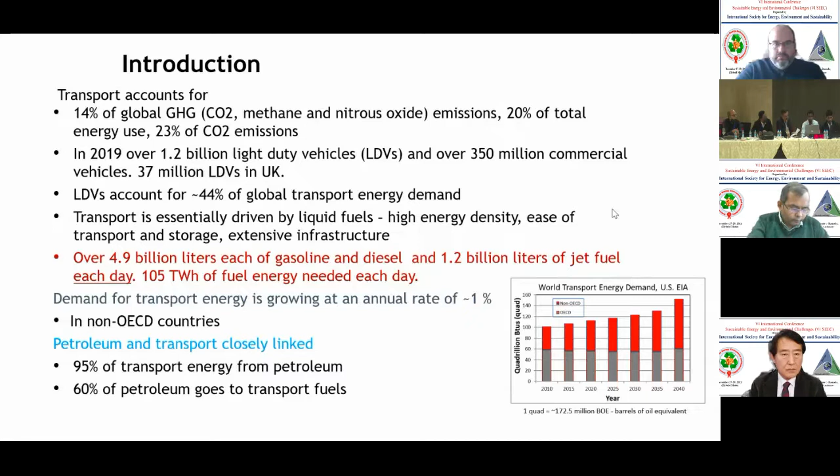Now I'd like to focus on electric vehicles. As you know, there are different degrees of electrification. Of all these, only full battery electric vehicles do not have an internal combustion engine, and all their energy comes from the electricity grid. There are, of course, in between vehicles like hybrid electric vehicles such as the Toyota Prius, which have a small battery. However, all their power and energy comes from the internal combustion engine. But electrification makes the whole process more efficient.

We also have plug-in hybrid electric vehicles, but these also have an internal combustion engine. So if you want to eliminate internal combustion engines, you have to replace all the cars with battery electric vehicles, essentially. Of course, we know that hybrid electric vehicles are the most practical and proven technology, and they're currently available, and they can reduce fuel consumption in gasoline light-duty vehicles.

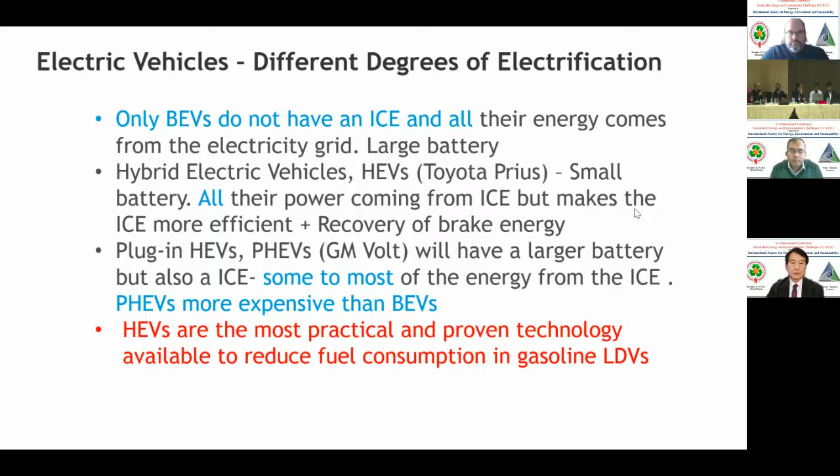Now, battery electric vehicle numbers are increasing fast. There's no question about it, because they start from a very low base. By the end of August 2021, the world had about 6.5 million. In fact, now they say there are about 7 million battery electric vehicles in the world, which is still about 0.5% of the total number of light-duty vehicles.

But another thing you have to remember is that battery electric vehicles are not really relevant for heavy-duty, long-distance road transport, shipping, and in fact it's impossible for aviation. So even if you replaced all cars, LDVs, with battery electric vehicles, you would still address only about 44-45% of global transport energy demand. We have to remember this.

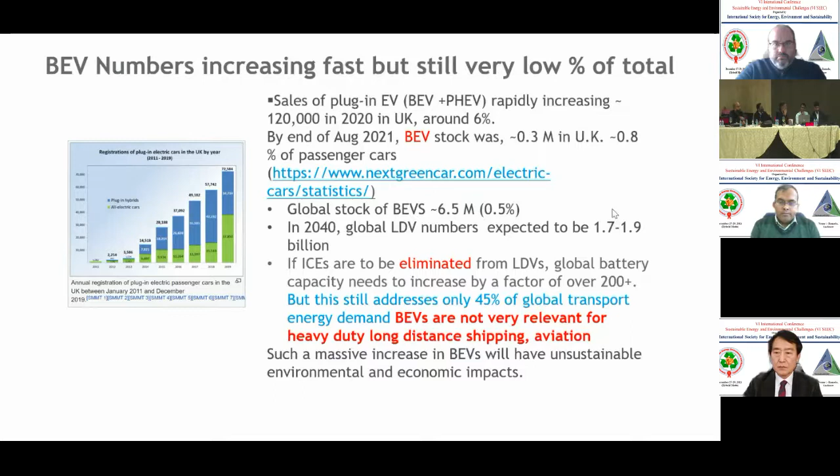However, such a massive increase in BEVs will have unsustainable environmental and economic impacts. Next slide, please.

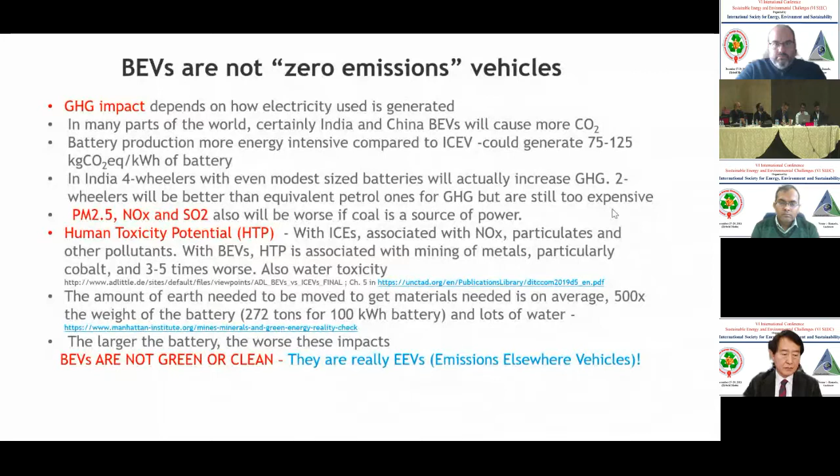What we have to remember, and what governments conveniently forget, is that BEVs are not zero emission vehicles. The greenhouse gas impact depends on how the electricity used is generated. For example, in India, a BEV will cause more CO2 in most places because electricity is generated from coal mostly. And of course, on a life cycle basis, battery production is very energy and CO2 intensive.

And if you take all this into account, for example, a recent study we completed with Professor Agarwal's group and so on, in India, four-wheelers with even modest size batteries will actually increase greenhouse gas emissions. Two-wheelers will be better than the equivalent petrol ones because they have very small batteries, and therefore the embedded energy and CO2 in the battery production is very small.

But these are extremely expensive still. I mean, most people who buy two-wheelers probably cannot afford to buy them, actually, even with existing subsidies. And of course, other emissions like...

particulates, NOx, and SO2 will also be worse if coal is the source of power. And similarly, human toxicity potential is associated with mining. So what you're basically doing is exporting the health impacts of battery electric vehicles somewhere else where they are not used, essentially.

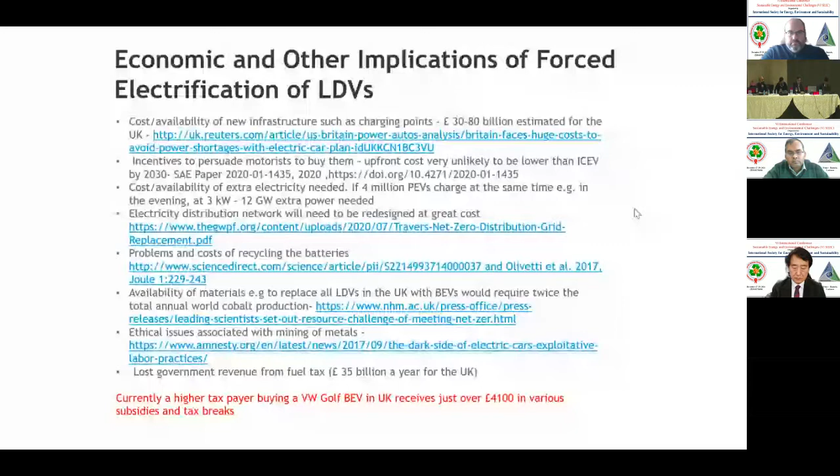So what is to be done to reduce impacts of transport? We have to recognize the scale of the challenge honestly. For example, aviation cannot be truly decarbonized. If you want to decarbonize aviation for all practical purposes, you have to shut it down. And you have to assess the impacts honestly on a life cycle basis, and recognize that alternatives, BEVs and new fuels, start from a very low base and face huge environmental and economic barriers to quick and unlimited growth.

Of course, there is significant scope to reduce energy use in ICEVs, in other words, improve its efficiency, for example with partial electrification like hybridization and so on. And there are other possibilities, using legislation to discourage travel, increase taxes on big cars, and so on. But these are beyond the scope of this talk.

The important thing to remember is we have to sensibly deploy and continuously improve all available technologies. BEVs cannot, and in fact must not, for environmental and other reasons, completely replace them.

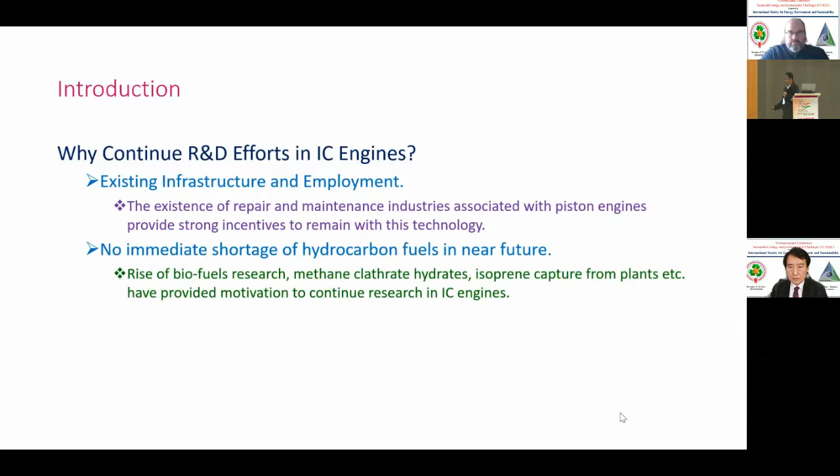There is no immediate shortage of hydrocarbon fuels in the near future. With the rise of biofuel research, methane clathrate hydrates, and isoprene capture from plants, there is motivation to continue research in IC engines. The only remaining question is increasing efficiency and reducing emissions. With the advent of fuel reforming, hydrocarbon fuels are not seen to be significantly different from each other. This concept has opened the opportunity to develop engines that can operate on multiple fuels, although this has not been pursued strongly in India.

Renewable fuels and carbon recycling become one of the avenues to address the issues of dirtier IC engines. Usage of renewable fuel helps address the typical notion of dirty IC engines, as carbon recycling and supplanting conventional fossil fuel becomes possible.

Whenever dealing with renewable fuels, the combustion and thermophysical properties play a role in the utilization percentage of the renewable fuel, so we are focused on that. What is basically a typical drop-in fuel? For a drop-in fuel, you need to match the thermophysical properties as well as the combustion properties.

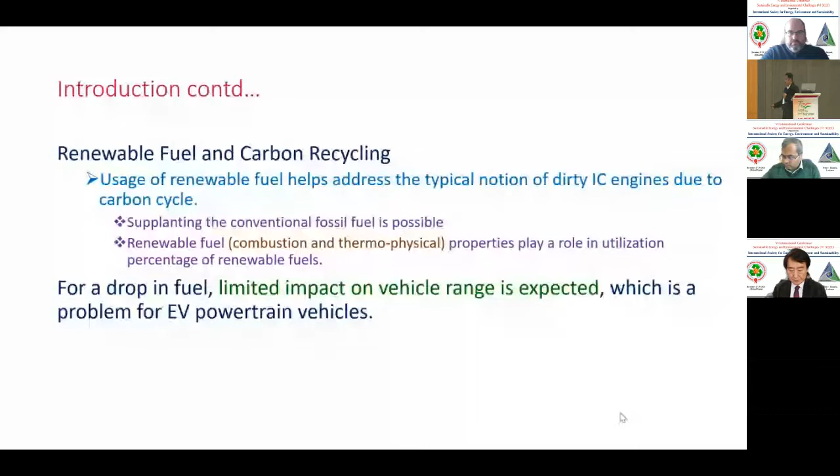What our research has focused on for a drop-in fuel is the limited impact on vehicle range, which is a problem for electric vehicle powertrains, and also from an implementation perspective, the drivability, that is the coefficient of variation, should be limited to 10% and needs to be looked into.

Now, with the recent trend of elimination of smaller size diesel engine passenger vehicles from the BS6 norms perspective, a test case for SI engine is considered. We see there are multiple alternative fuels available for CI engines, but very limited fuels are available for SI engines. So I have taken here the cases for SI engines.

Okay, so coming to the first test case where PFI engine performance is shown on ternary blend involving the lemon peel oil, the ethanol, and gasoline. And these are the typical properties being compared.

If you look into the properties, the calorific value as well as the stoichiometric air fuel ratio are very comparable to gasoline, and it has got acceptable octane number rating also. In case of the ternary blend, we could always use the ethanol from the octane number improvement perspective.

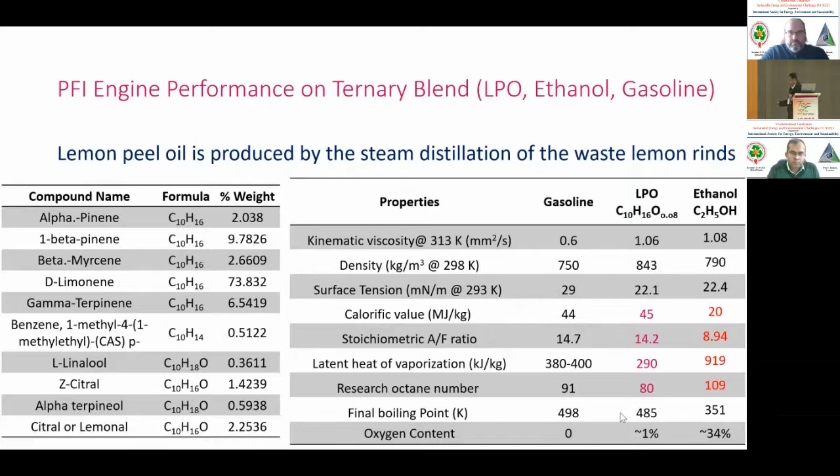Now, the blend properties from the perspective of heat addition per unit mass in cylinder for drop-in fuel perspective: a deviation within the limit of 5% is considered here, because we were looking into keeping the vehicle range the same, as well as having the coefficient of variation less than 10%.

We all know that if you go with ethanol, increasing the ethanol percentage beyond 20% leads to the coefficient of variation greater than 10%. So there are restrictions when you deal with other alternative fuels.

Now this means that we ensure heat addition per unit mass in the cylinder, with respect to the conventional fuel and the renewable fuel blend, limits to plus minus 5%, but that doesn't mean that the kinetics is the same.

What we expect is a limit on the growing discrepancy, because we always know that heat release per unit vessel mass would control your temperatures, and the Arrhenius law will play a role in reaction rate kinetics, and the discrepancy would be limited if we try to maintain that.

So we already know that the peak pressure based combustion phasing is observed to be advanced for this ternary blend, because both LPO, that is lemon peel oil, as well as ethanol have higher flame speeds compared to gasoline.

Now here, if you look into the nomenclature, the alphabets G, E, and L refer to gasoline, ethanol, and lemon peel oil, and the numbers indicate the volumetric fraction used in the blend.

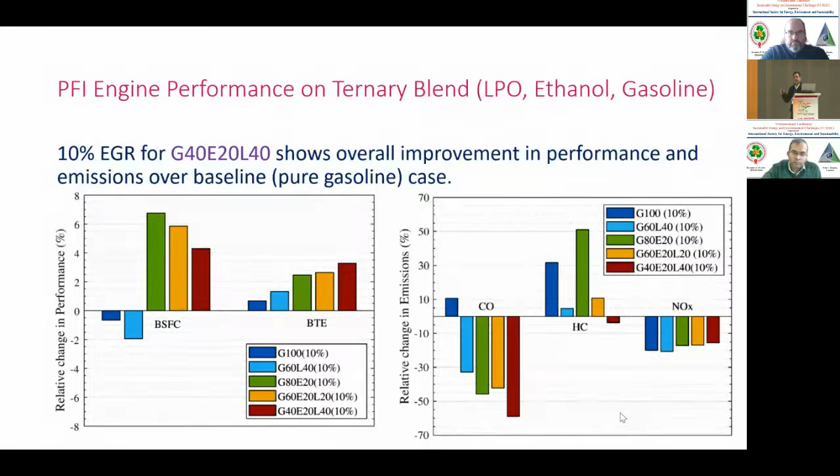That's because we have to deal with the utilization of 10% EGR to bring this NOx down compared to the baseline gasoline. So we can say that G40, E20, and L40 gives overall improvement in performance over baseline gasoline with 60% utilization of renewable fuel.

So coming to the next test case, which is essentially the spray characterization perspective on alternative fuels for GDI engines. For liquid fuel combustion, atomization plays an important role in mixture preparation, and thermophysical properties of renewable fuel impact spray formation. For this, we have utilized the constant volume chamber for spray diagnostics and the PDPA measurement campaign.

What is done is the ambient conditions are changed to simulate the pressure and temperature conditions for 30-degree BTDC, 60-degree BTDC, and 90-degree BTDC crank angle. So the pressures and temperatures are somewhere like 1.5 bar 329 Kelvin, 2.5 bar 371 Kelvin, and 6 bar 453 Kelvin.

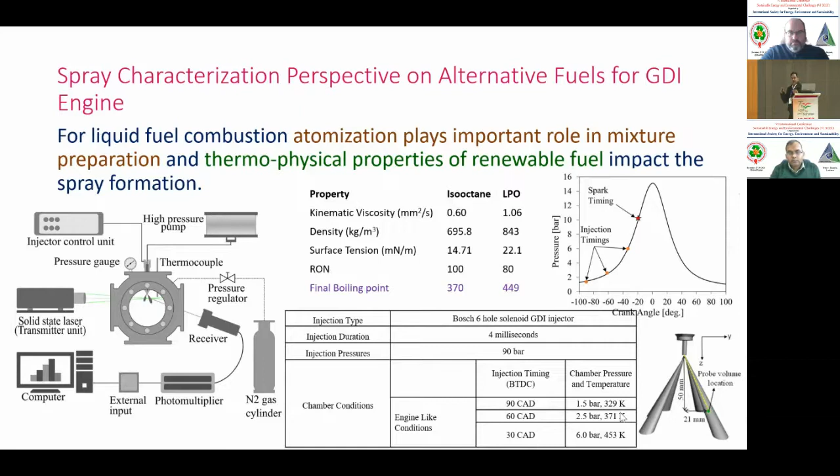So if you look into the boiling point, we are looking at the isooctane and LPO comparison, like non-evaporating sprays and near-evaporating sprays.

Okay, so here, again from the perspective of brevity, I am just presenting the salient results, and you are seeing here the isooctane and lemon peel oil cumulative volume fraction for the first situation, 1 bar and 298 Kelvin. Both of these sprays are non-evaporating sprays. Then isooctane goes close to near evaporating in comparison with non-evaporating LPO sprays. Then you have got evaporating isooctane and near evaporating LPO spray here.

So if you look into the perspective, you compare at 17 micron SMD, the droplet size. The cumulative volume fraction is indicating that the LPO is atomizing the chunk of liquid fuel only close to 45% below 17 micron droplet size. All the rest is above the 17 micron droplet size. And for isooctane you are seeing it's nearly close to 80%, from the atomization perspective.

So that leads to the conclusion slide. We have demonstrated 60% utilization of renewable fuel. Matching the combustion and thermophysical properties enables maximum utilization of the renewable fuel. For 100% renewable fuel, intricate thermal management for fuel delivery and EGR would need to be looked into. Considering the roadmap for the future, looking into variable compression ratio of opposed-piston engines for full reliance on renewable fuels may be needed to improve thermal efficiencies compared to the alternate powertrain. With that, I'll finish my presentation.

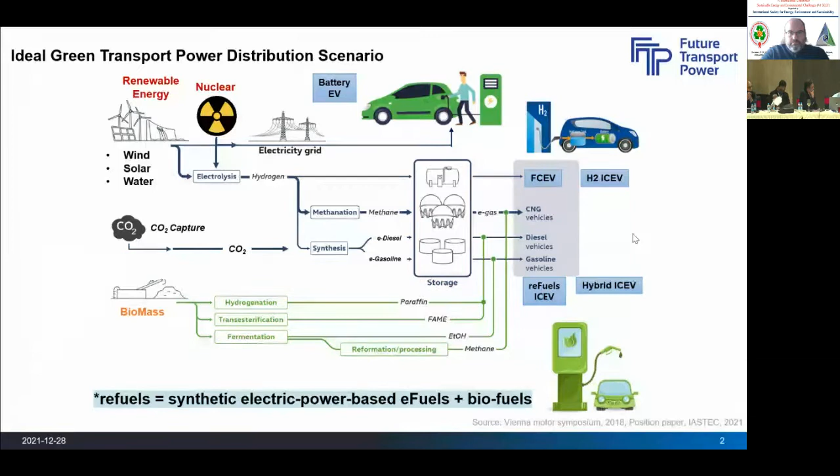Next, please. This e-fuel is a synthetic carbon-neutral fuel which is made by the recycling of CO2. Even though the internal combustion engine emits CO2, this is captured and then combined with hydrogen to produce e-fuel. The hydrogen is produced through electrolysis, utilizing the electricity made from renewable energy resources. So this cycle makes carbon neutrality. Next, please.

This is a type of ideal e-fuel production. CO2 is captured from the ambient air, and the green hydrogen is combined through the Fischer-Tropsch process to make higher-value hydrocarbon fuels compatible with gasoline, diesel and so on. So this kind of liquid fuel production utilizing CO2 serves CO2 reduction. Next, please.

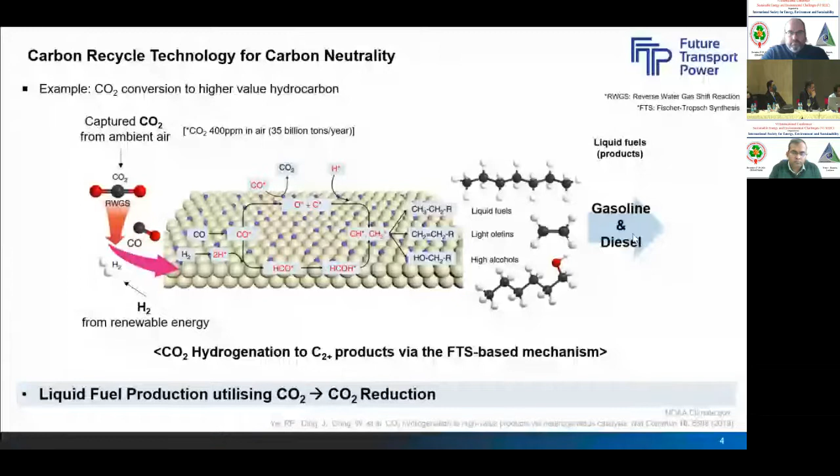E-fuel is a product of CCU technology, which is carbon capture and utilization. Starting from the basic e-fuel, hydrogen, the spectrum of e-fuel covers all different kinds of hydrocarbons such as e-gasoline, e-diesel, e-LPG, e-jet fuel, e-methane, e-DME, e-methanol, e-ammonia, etc. Especially e-methanol and e-ammonia are regarded as very effective liquid energy carriers which can compensate the lack of renewable energy in most advanced countries. So e-methanol and e-ammonia could be traded globally to make the balance and suffice the need of energy.

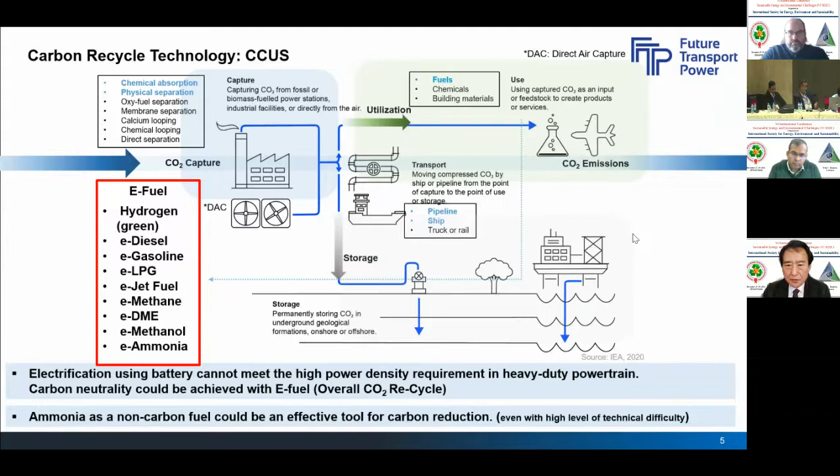And e-fuel is desperately needed for the high energy and power density transportation field, which was already mentioned by Dr. Gautam Kalghatgi, and I found yesterday in session 1A on fuels, this kind of e-fuel production, application and feasibility were already touched. I appreciate the comprehensive contents of the 1A session. Next, please.

One big challenge for e-fuel is the efficiency issue. Compared to battery electric vehicles, the internal combustion engine vehicle utilizing e-fuel has very low efficiency under the condition that all the energy resources are from renewable energies. Still, we should improve the efficiency by maximizing the use of hybrid powertrains. The efficiency of this is still half of the battery electric vehicle, but definitely you still need this kind of fuel for high energy density and high power density transportation tools, such as aviation, marine, and heavy-duty on-road vehicles. Next, please.

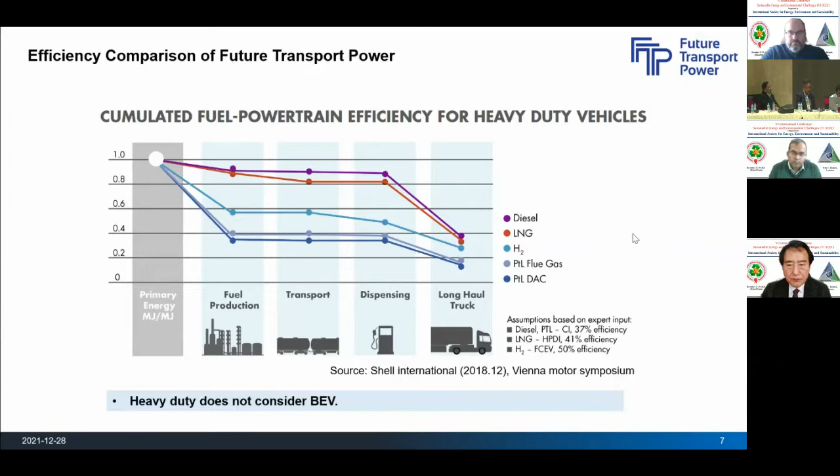This is an example of the heavy-duty vehicle case. This is the field where the battery electric powertrain could not be implemented. The efficiency of e-fuel is still just half of the conventional diesel powertrain. Next, please. However, in the case of marine application, the level of efficiency of the internal combustion engine is similar to or higher than the battery electric vehicle.

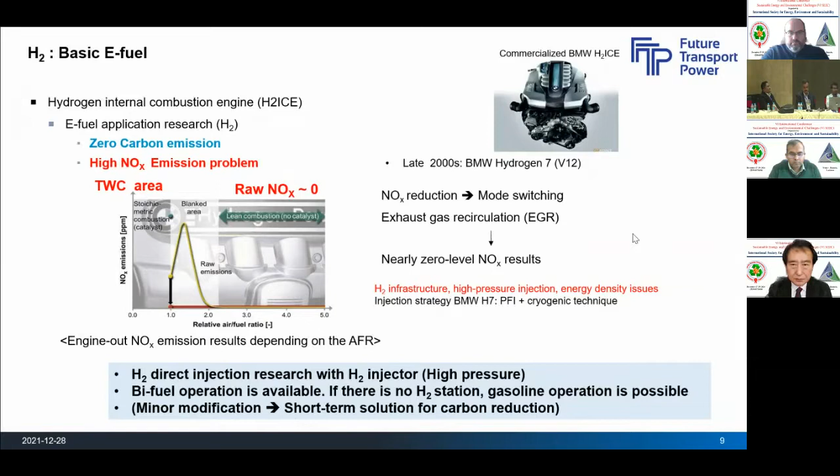Next, please. The very basic e-fuel is hydrogen, and we are trying to achieve carbonless combustion operation. This hydrogen combustion would be a perfect carbon neutral solution as long as NOx emission is reduced or removed somehow. Next, please. We are trying to realize the hydrogen internal combustion engine

by optimizing the lean stratified charge combustion. This optimal design could be done by the observation of hydrogen jet and mixture formation followed by ignition and flame propagation. Next, please.

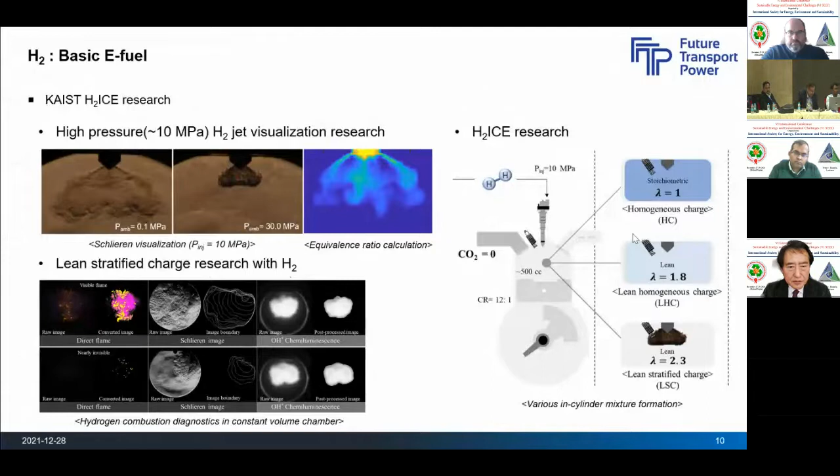Let me summarize by rephrasing the benefits and the visions of e-fuel. It is effective to import liquid energy carriers by applying power-to-liquid technology, which has a high energy density. Liquid fuels are economical for storage and transportation, while renewable energy resources are not enough in most countries.

E-fuel is part of carbon capture and utilization technology that actively utilizes and reduces carbon dioxide, and is essential as a transport power fuel with high power and energy density. Large commercial vehicles are expected to develop technology with the adoption of e-fuel.

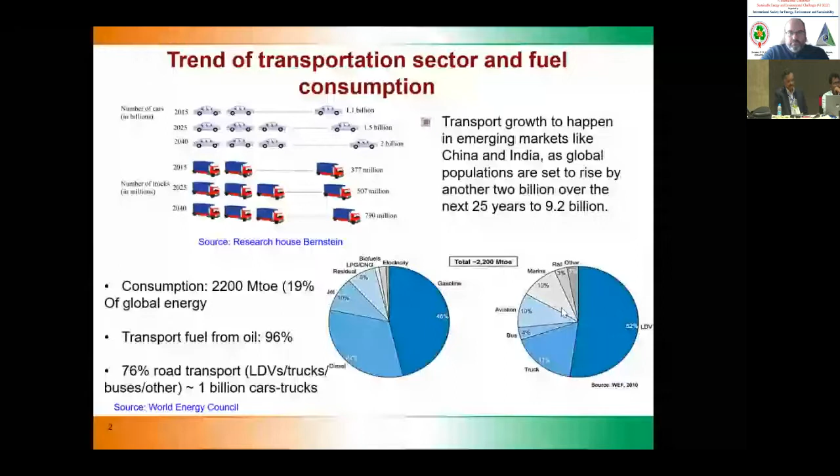So the basic idea is that road transportation will be dependent on fuel powered vehicles. That is the basic motivation for this slide, and Professor Kalghatgi has presented a lot more data on this. So next slide, please.

And then there are customer demands; people want to use SUVs and more torque or power, and these kinds of demands are there. So these are the challenges, and based on these challenges, there are several options available.

Options such as battery electric vehicles, fuel cell based electric vehicles, hybrid vehicles, and alternative fuels or alternative combustion engine based vehicles. There are many alternative fuels like alcohol and natural gas. In all of these there are critical obstacles for implementation. Some of these obstacles were already discussed by Professor Kalghatgi regarding battery electric vehicles, based on the availability of raw material, economics, and several other aspects.

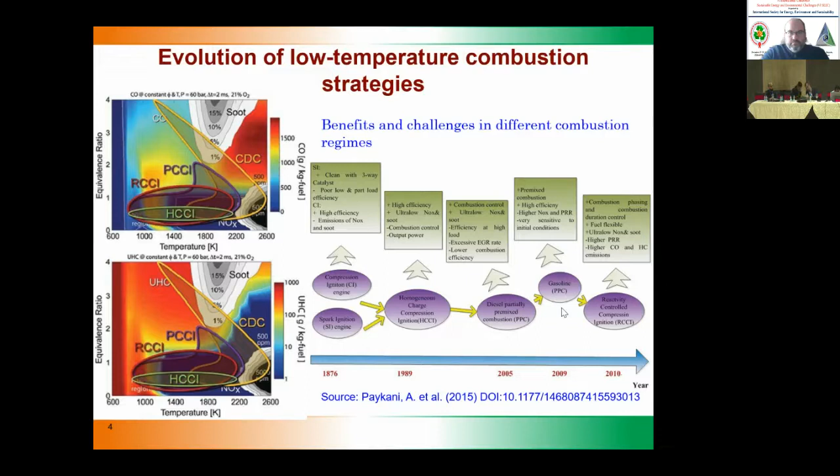And low temperature combustion means it is well below the temperature limit of NOx formation and soot formation, which can be seen in this graph of the operating range of various low temperature combustion strategies. So this is just an overview. Next slide, please.

So based on this, I have just tried to summarize the aspects of the IC engine research. So we have to improve the efficiency and reduce the emission. For this, the combustion control and after treatment system, like the low temperature after treatment systems, are required. So gasoline particulate filter and these things are coming up because of gasoline direct injection and all.

So with respect to this, maybe we have to work on alternative fuels, like low octane fuel like naphtha for gasoline compression ignition kind of modes, and high carbon alcohol fuel, maybe butanol, it has better mixing characteristics. And these are some of the things related to alternative combustion regimes, like HCCI, RCCI and all.

There are many challenges. You have a minute to continue, yes, please. Yeah, so next slide, please.

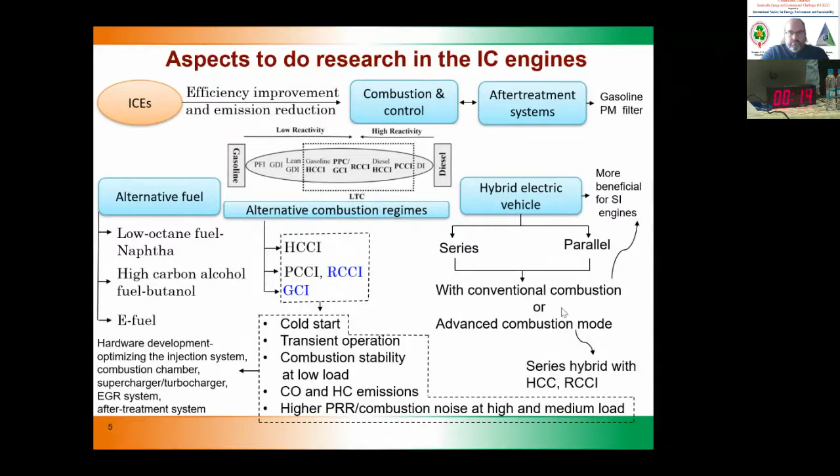So this is just an option that these low temperature combustion vehicles can be used for hybridization, and it may work better because it has better efficiency at lower engine loads also. So next slide, please.

So from this, I just wanted to emphasize that for several decades, powered by internal combustion engines, global transport is dependent on fossil fuels, and we have to work in development of clean alternative fuels and alternative combustion modes, and hybridization with advanced combustion modes such as RCCI will be possible.

And the future transport will rely on various government regulation policies with respect to infrastructure, emission regulation, and the production related issues with refineries. And it also depends on consumer behavior, perception, and choices. This will lead to the future of the transportation sector.

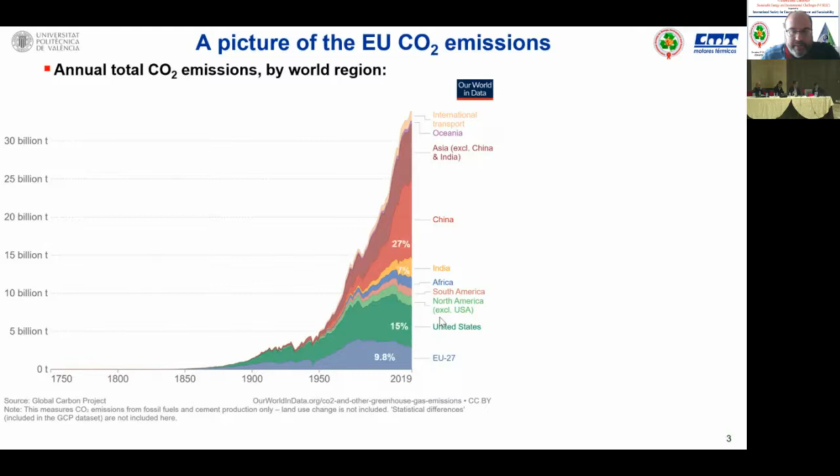Next slide, yeah. Okay, so here you have a picture of the European CO2 emission, in which you have the annual total CO2 emissions by global regions. So there you can see in different colors the European Union. You can click, please, in order to put the animation. One more, okay, up to there. Just slide number 3, okay.

Well, the thing that you can realize here is that we have a huge increase in the CO2 emissions, but in those regions which are the more dominant producers in terms of CO2, like China, for instance, or Asia, excluding China and India.

Well, if we go to European road transportation, we have something like 18% of the total CO2 in Europe. So if you go in detail for each one of the different sectors, you can realize that heavy duty is around 25%, medium duty is something like 12%, passenger cars are around 60%, and bikes are almost negligible.

So this means that in terms of the European Union, it's representing a small part of the total amount of CO2 in the world. So we are discussing in Europe about 1.7% of the world CO2 emissions. So it's quite a small number. So maybe you can go to the next slide.

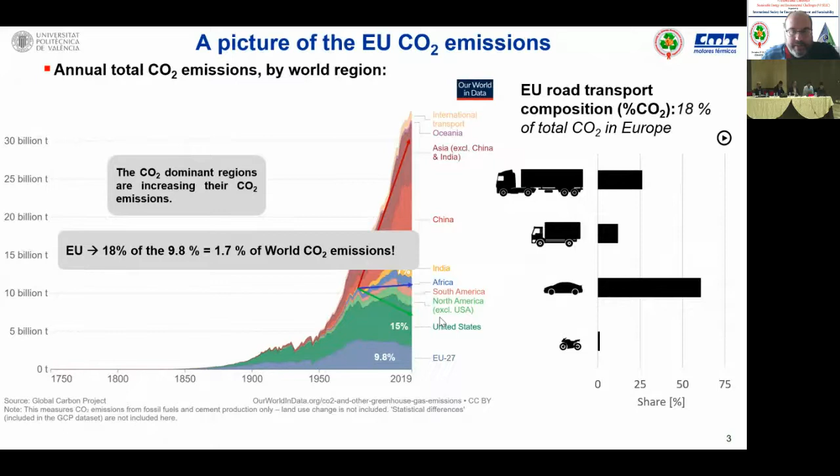The idea is how the European Union is planning to reduce this 1.7% of CO2. So next slide. You can make all the animations for this slide. One more.

Okay, that's it. Well, if you take the recent movements of the European Union, you can see that in 2019 we started with the Green Deal. This means that net-zero greenhouse gas emissions are needed by 2050. In 2020, Euro 7, as a regulation, started sounding very hard, but even now it's not in the street. Euro 7 is focused on accelerating the shift to sustainable and smart mobility.

And finally, in July 2021, Fit for 55 appeared, which says that at least 55% of the emissions we have right now need to be reduced by 2030, and all new cars registered by 2035 will be zero in terms of tailpipe emissions. This means either electric vehicles, hydrogen or ammonia. But this doesn't necessarily mean that we are going to ban all internal combustion engines in Europe, because internal combustion engines can be even cleaner than electric vehicles. So maybe next slide.

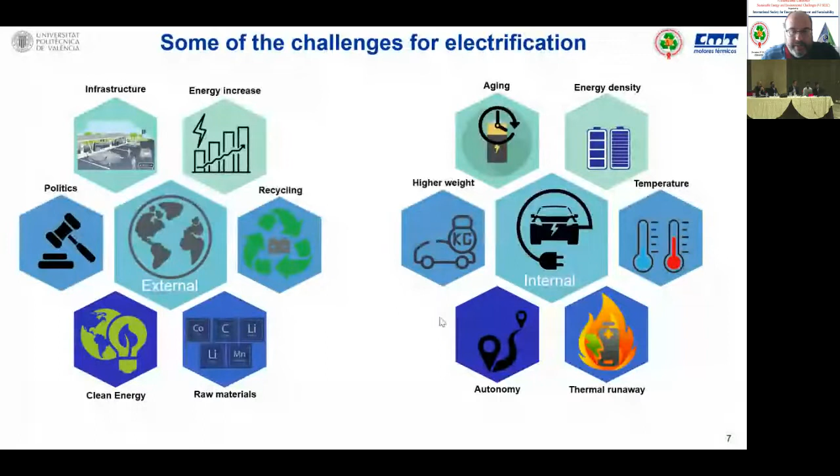What is clear is that it's not going to be tomorrow that everything in Europe is electric vehicles. We have a lot of challenges that need to be solved, and a huge transition period. Next slide. Okay, how can the internal combustion engine be an alternative here? Next slide.

From left to right, you have the CO2 emissions of passenger cars in megatons of CO2 over time. In gray you have the historical series. The gray dotted line shows the point we will reach following the 2030 regulations, and the dotted blue line shows where we will arrive following the European Green Deal. This means we have about 3.7 gigatons of CO2 that we need to reduce.

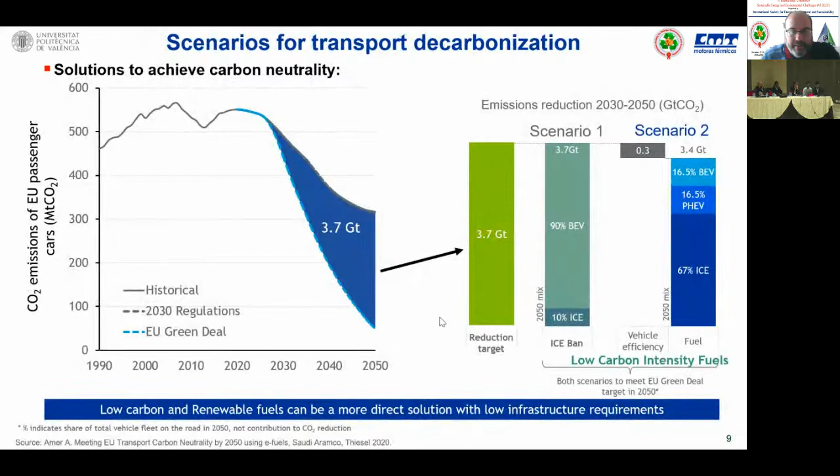Then we have two scenarios. The first is one in which the internal combustion engine is banned, using the expected 2050 electricity mix: 10% internal combustion engines, 90% electric vehicles. Maybe you can play the animation, please click. Then we have the other scenario. Sorry, can you go back? Yeah. In the second scenario, almost 70% of the cars can have internal combustion engines, but with electrification: something like 16% pure electric vehicles and the rest plug-ins or full hybrids. The idea here is that low carbon and renewable fuels can be a more direct solution with low infrastructure requirements. Next slide.

Well, from left to right, you have a possible pathway to decarbonize transport, with CO2 savings in light duty and also heavy duty. On the left side you have the CO2 equivalent for a comparison of the Kia Niro as a full hybrid, plug-in or battery electric vehicle. The different colored bars show the CO2 produced by the manufacturing of the car, the battery, the fuel, the electricity, and the end of life.

Just looking at this graph for the Kia Niro, exactly the same vehicle, you can see that by using, for instance, hydrogenated vegetable oil, you achieve really nice CO2 equivalent per kilometer compared with electric vehicles, even if you use the 2050 electricity mix. It's quite similar on the right side when you compare the electric vehicle in heavy duty against an internal combustion engine vehicle also using hydrogenated vegetable oil. So they are quite comparable technologies. Can you go to the next slide?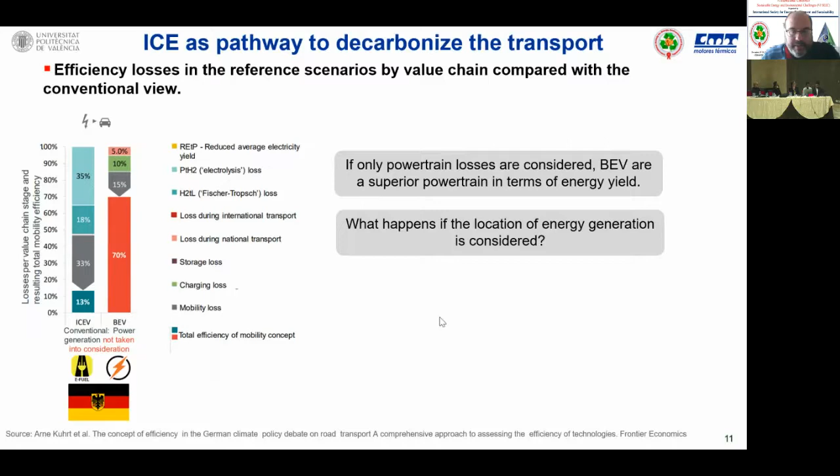What happens if we compare considering the location of the energy generation? If you click the animation, here you see the scenario in which we can compare the different places where the energy is produced, and the efficiency of procuring that energy.

You can compare dependent on wind or solar energy. If you compare, for instance, Germany versus Morocco or Algeria or even Chile, you can realize we are having a third of the efficiency procuring this green electricity, because electrical vehicles may only make sense in terms of CO2 if they are using green electricity.

If you compare, on the left-hand side you have the previous scenario, and on the right-hand side the scenario right now, where we compare the 13% internal combustion engine vehicle efficiency using green electricity coming from Morocco, with an electrical vehicle using green electricity produced in Germany.

There you have only 1% of difference. What I want to highlight here is that a holistic approach of where the electricity or the e-fuel is produced is super important in order to make direct comparisons.

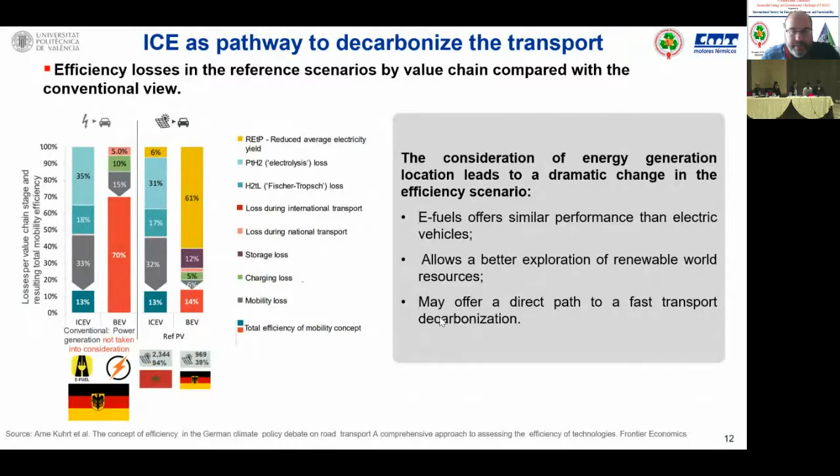So then we have the takeaways: here you have the different decarbonization ambitions in transport. The electrification needs - it's not really for today or tomorrow, it has a transition. Low carbon fuels need to be deployed in order to achieve carbon neutrality. You have to take advantage of the infrastructure, and you can apply it to other applications as other speakers have said.

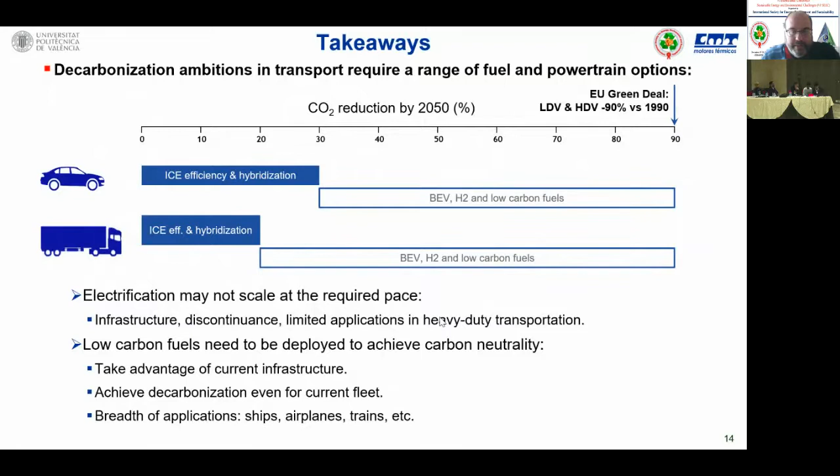This is something you should also have in mind: we need cleaner fuels also for cleaner engines, and this is part of the solution. As a European, we are going to be the first continent to have carbon neutrality by 2050, but I don't know exactly what the counterpart will be, or what different problems we will attain in terms of where we are going to appear in the rest of the world.

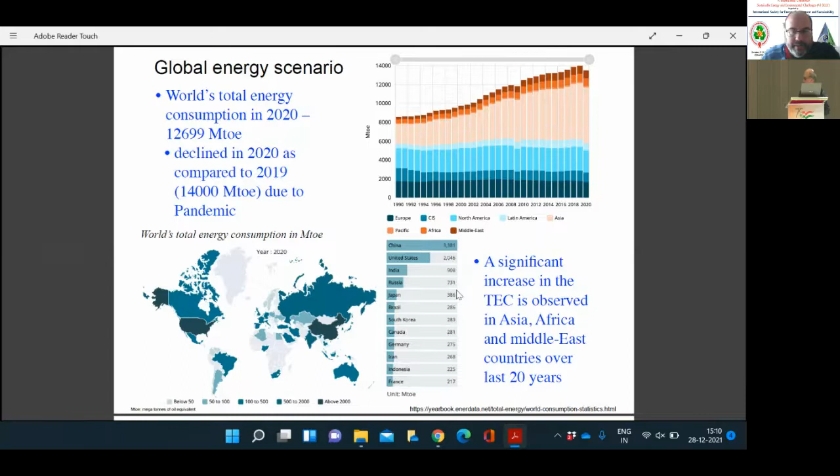If we see this global energy scenario, we see that the total energy consumption is growing every year, and in 2020 it was relatively lower than 2019, particularly due to the pandemic situation. But there is quite a significant increase in total energy consumption in developing nations, particularly continents in Asia, Africa, and Middle East, from the last 20 years. As you could see, these graphs are growing quite significantly, so there is a need of more energy consumption there.

We are also committed for 2070 now. So if we see the share of energy in terms of renewable and non-renewable, still we have a significant share based on non-renewable generation, which is about 74-75% here, and 26% coming from renewable, which is also primarily because of hydro, wind, and solar, and the bio share is only 2.2%.

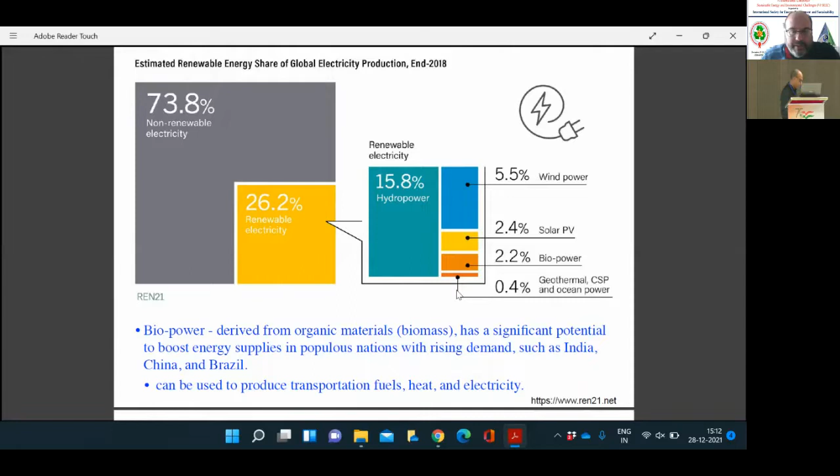So there is a significant potential to boost energy supplies, particularly in populous nations with rising demand, such as India, China, and Brazil. This can be used to produce transportation fuels for heat and electricity generation, as discussed by other panelists. This is going to be very important in the future, and I'm not talking about hydrogen and hydrogen carriers in this presentation, which has already been covered.

So biomass is expected to double globally by 2022 as compared to 2012, so it's going to play a more and more important role. The government of India has also raised its target for the renewable energy share. India has high potential to generate 28 gigawatts of bioenergy, with annual biomass availability of around 750 million metric tons.

We have certain schemes going on now to promote this biomass-based bioenergy, which could come through animal manure, crops, food waste, and generating through biowaste. The main advantage is eliminating methane emissions and reducing carbon dioxide emissions. So it can be used for power generation, or it can be further upgraded to biomethane, and then used for transportation purposes.

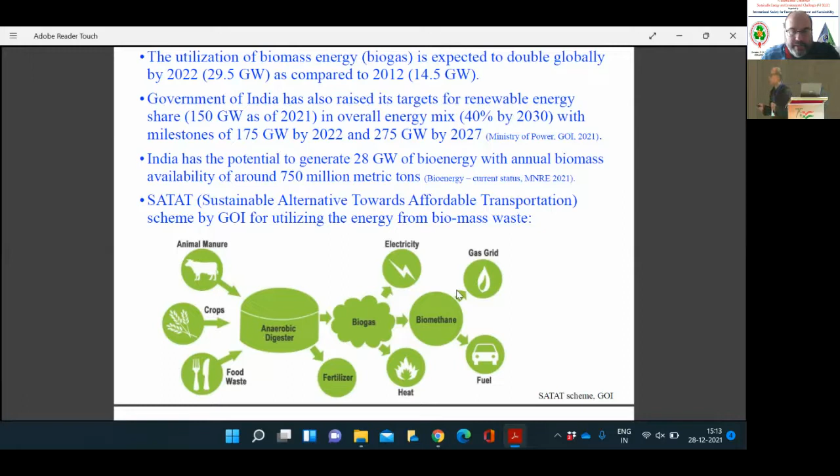Coming to biogas-fueled IC engines, there is significant potential, as we have seen, with the low numbers in bioenergy for overall renewable energy share. It has considerable potential to be a sustainable energy source for mobile and stationary applications, where biogas could be upgraded to biomethane for transportation applications.

Advantages of biogas: low carbon footprint, waste volume reduction, and eliminating methane emission from natural degradation. All these advantages, but there come a lot of disadvantages also - you see fuel composition variations in gas production from place to place and time to time, and a high amount of CO2. All these limitations actually end up reducing the operating range of the engine.

If you see some plots here, this clearly shows the operating range with respect to the Wobbe index. Biogas typically has around 40% CO2, so in this plot, with 40% CO2, the Wobbe index is around 20. So the operating range with biogas is quite narrow. If we get to the pure methane situation, this is the operating range. So all these limitations actually bring the operating range to be narrow, and we have to find solutions to increase that.

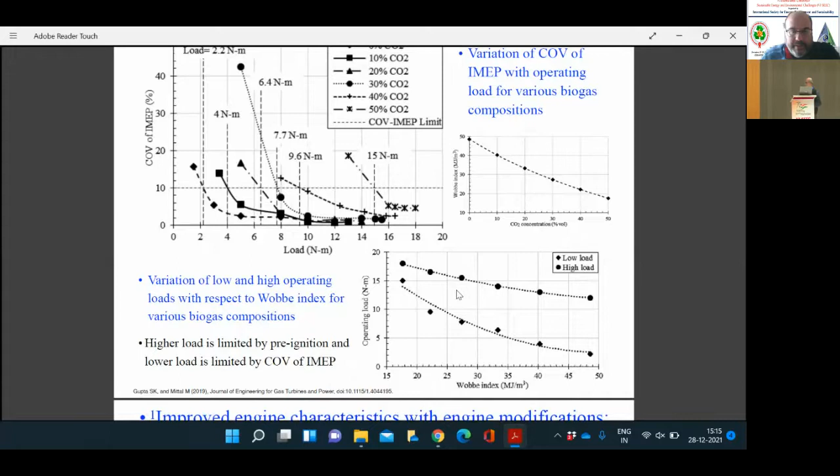Overall, we can try to mitigate these disadvantages and make it workable for electricity purposes and other things. I'm not going into much detail here. I think one of the ways to improve engine characteristics is using variable compression ratios.

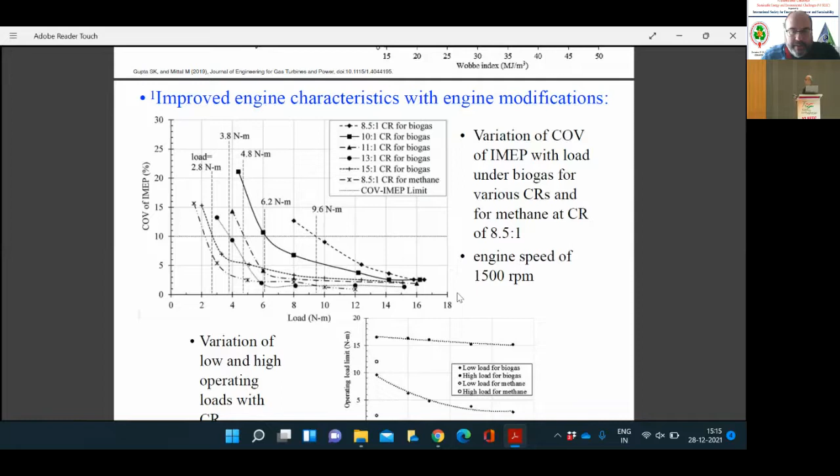If you will see over here, you could see that if the compression ratio is increased, going from the typical 9 and around in gasoline engines, the operating range is very close to the methane case. So we can certainly do some engine modifications by varying the compression ratio. We could also get into variable valve actuation systems - we are also working on that side - so that could help in mitigating these limitations.

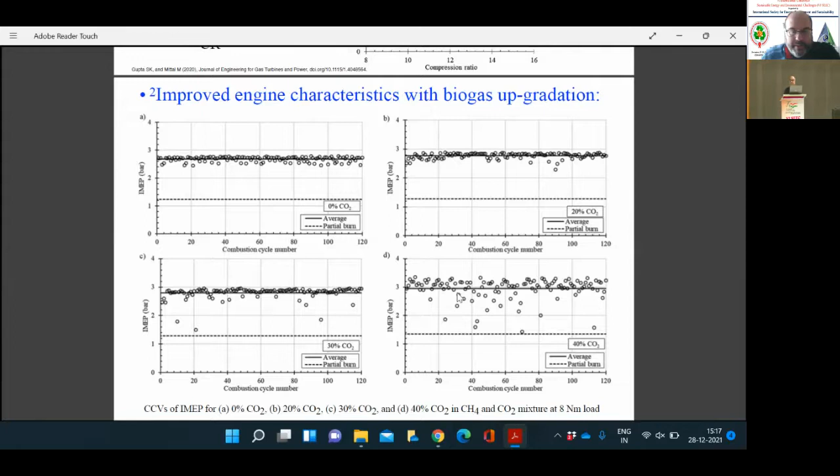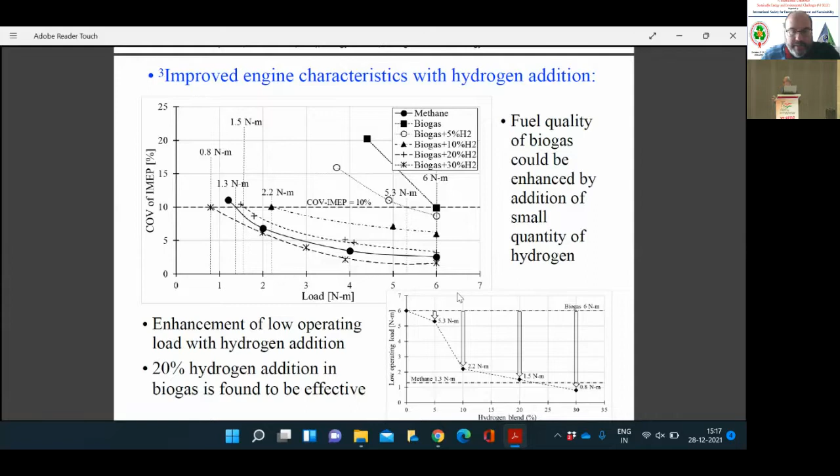There is also improved engine characteristics with hydrogen addition, and fuel quality can be improved. This plot shows experiments conducted particularly at lower load, because at higher load we are good with biogas by itself, even reaching higher operating limits. At low load, we are limited to 6 Nm on our particular engine. With a small amount of hydrogen addition, we can get closer to the low load limit of 0.8 Newton meter. So there are some interesting ways to extend the operating range.

With that, I'll conclude. Biogas is an attractive replacement for conventional fuels in engines and heat generation applications. Of course, there are limitations which can be improved through engine modifications and fuel quality improvement, along with a small quantity of hydrogen. Hydrogen can also come as green hydrogen, which will be supportive. Future pathways include development of efficient biogas upgradation techniques, since those are limiting factors, and specific engine modifications needed to make these engines more feasible for power generation purposes. Thank you.

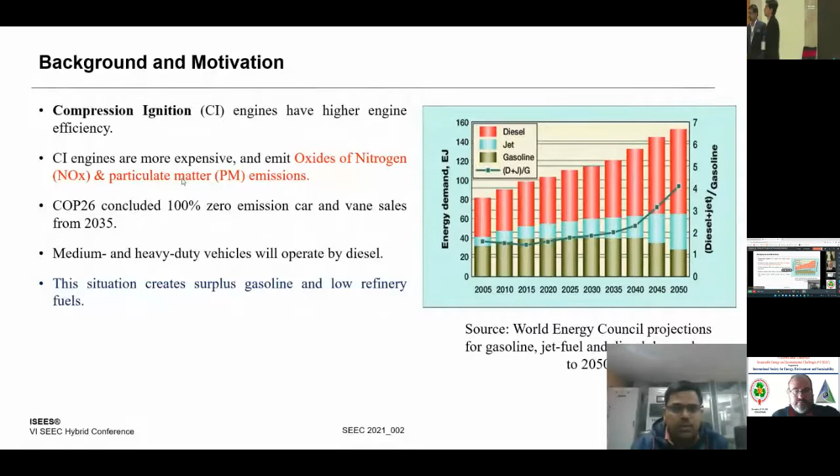However, medium and heavy-duty vehicles will be operated by diesel fuel. So this situation creates surplus gasoline and low refinery fuels. Hence, we need to find an engine which utilizes low refinery fuels and is able to control the harmful emissions from the engine. Methodology. GCI technology utilizes low-octane gasoline in place of diesel in the compression ignition engine. GCI technology takes advantage of the higher compression ratio of the CI engine and excellent ignition delay characteristics of gasoline. RON between 70 to 80 can be used for GCI mode engine applications.

So this figure shows the prospects of GCI technology. And test conditions are given in this table. Engine load varied from 3 to 5 bar brake mean effective pressure, and a triple injection strategy was used for GCI mode. In case of CI mode, we used a double injection strategy. This figure shows the schematic of the injection pattern and the injection mass ratios. Results and discussion. This figure shows the in-cylinder pressure for 5 bar, 4 bar and 3 bar brake mean effective pressure cases.

Comparatively lower in-cylinder pressure was observed for GCI mode than CI mode conditions. Increasing the pilot injection ratio increases the in-cylinder charge homogeneity, resulting in higher in-cylinder pressure. Comparatively higher in-cylinder pressure and combustion noise was observed for advanced injection timing cases than retarded injection timing cases.

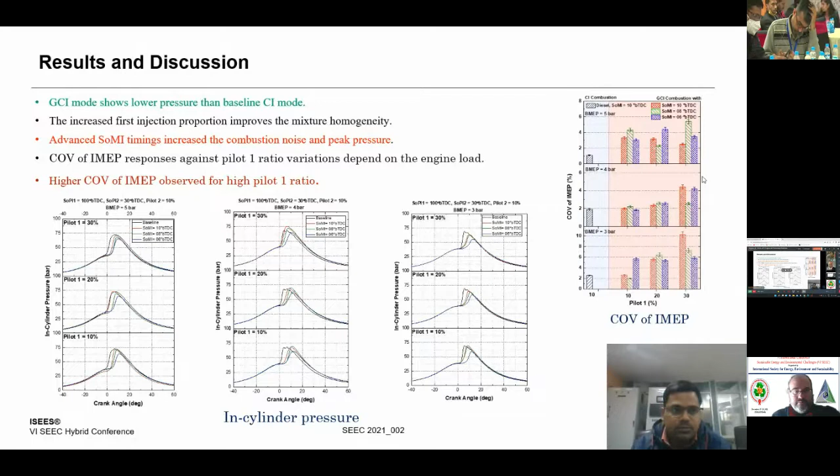Coefficient of variation of indicated mean effective pressure was higher in low engine load compared to high engine loads, and it was higher in higher pilot injection ratio cases. COV of MPRR was higher in low engine load cases than high engine load cases. Comparable thermal efficiency was observed for GCI and CI mode engine operations.

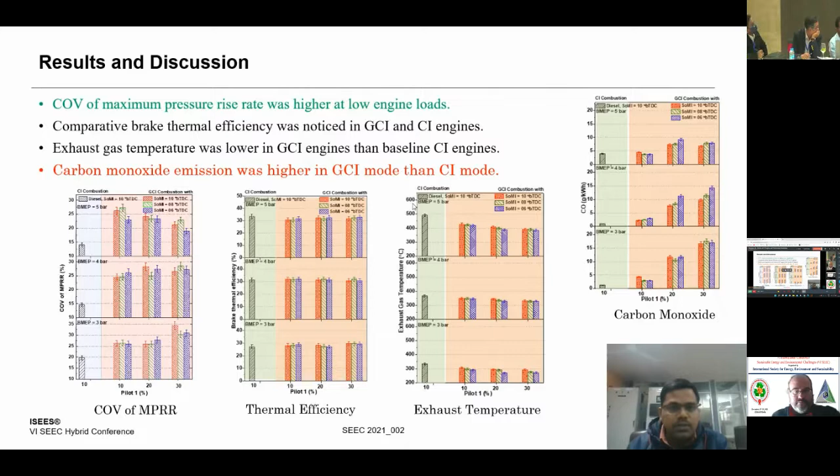Comparatively lower exhaust gas temperature was observed for GCI mode than CI mode engine operations. Comparatively higher CO and HC emissions were observed for GCI mode engine operation than baseline CI mode. Around 50% reduction in NOx and soot emissions was observed in GCI mode engine operations compared to baseline diesel conditions.

Major conclusions are: GCI mode engine operation with the triple injection strategy reduces the rate of pressure rise and combustion noise. Start of main injection timing strongly affects the in-cylinder combustion characteristics, and cycle-to-cycle variations were lesser in high engine loads compared to low engine load cases.

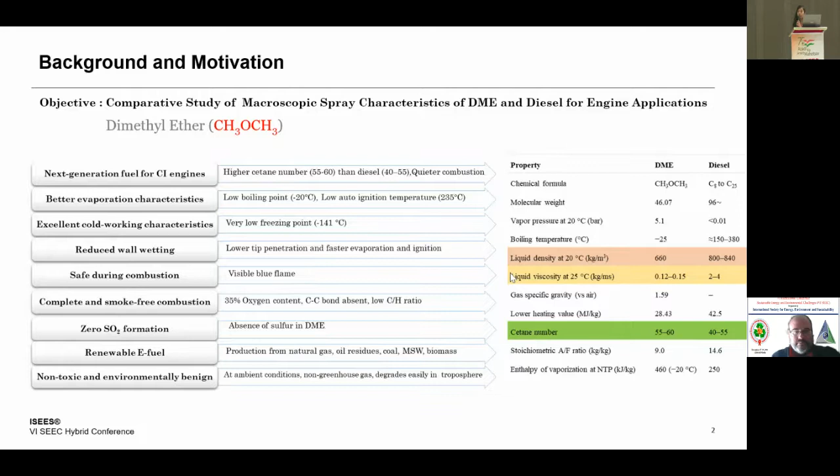We are doing a spray characteristics study because spray characteristics determine the air fuel mixing. It affects the heat release rate, the combustion, and eventually the emissions. Coming to the methodology, we use two techniques for this study: Mie scattering and DBI for both DME and diesel. And we also use two types of injectors for both these techniques.

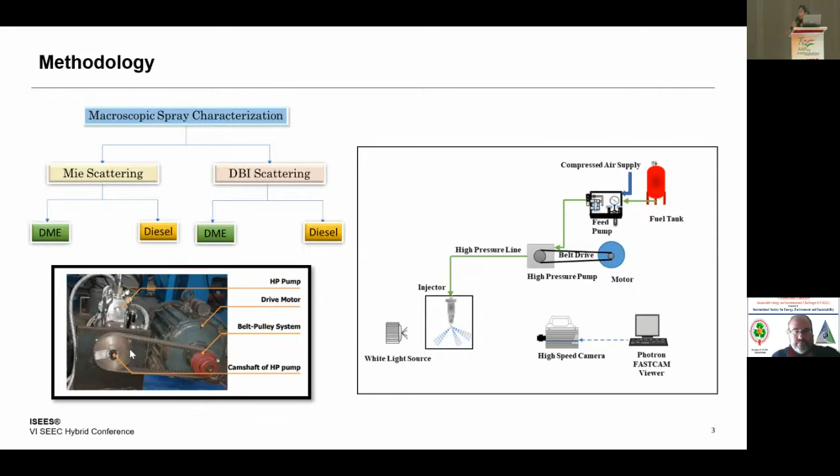For the experimental setup, the camshaft of the high pressure pump is coupled to the motor using a belt drive, and because DME is a gas at ambient conditions, we used a feed pump to pressurize the fuel, and then it is again pressurized using a high pressure pump, and the fuel is then injected through the injector. And we used a white light source, the high speed camera, and the computer.

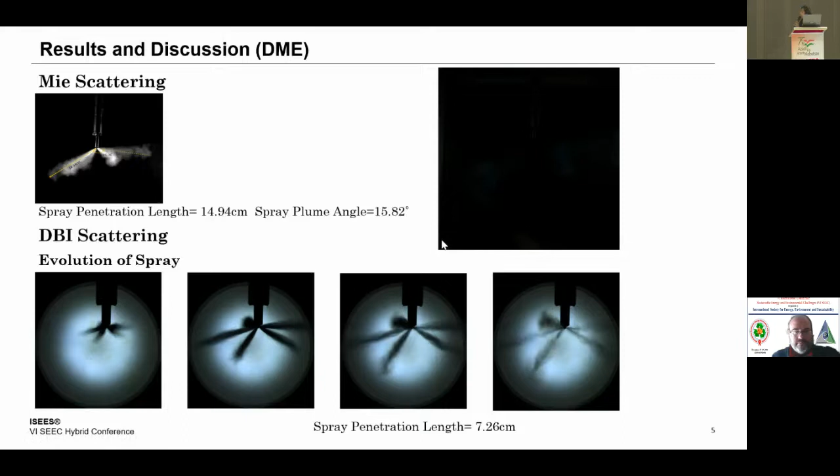Now coming to the results of DME, it was observed that the spray penetration length for DME was lower than that of diesel, whereas the spray plume angle was greater for DME. And here is a video showing the spray of DME. I hope it was visible.

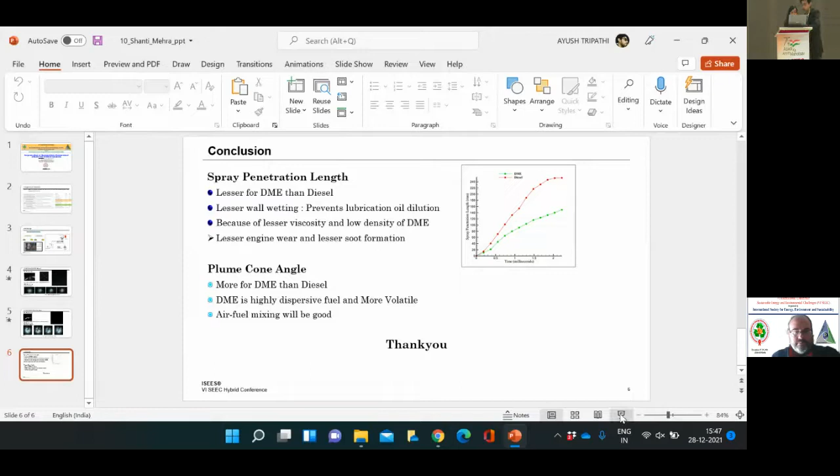Coming to the conclusion, the spray penetration length was lesser for DME as compared to diesel because of the lesser viscosity and low density of DME. Because of that, the wall wetting will be lesser for DME, and it will prevent the lubrication oil dilution. So if less lubrication oil is burnt in the combustion chamber, the particulate emission will be lesser, and the engine wear will also be lesser.

On the contrary, the plume cone angle is greater for DME because DME is a highly dispersive fuel and it is also more volatile. So the air fuel mixing will be good, and the combustion would be proper.

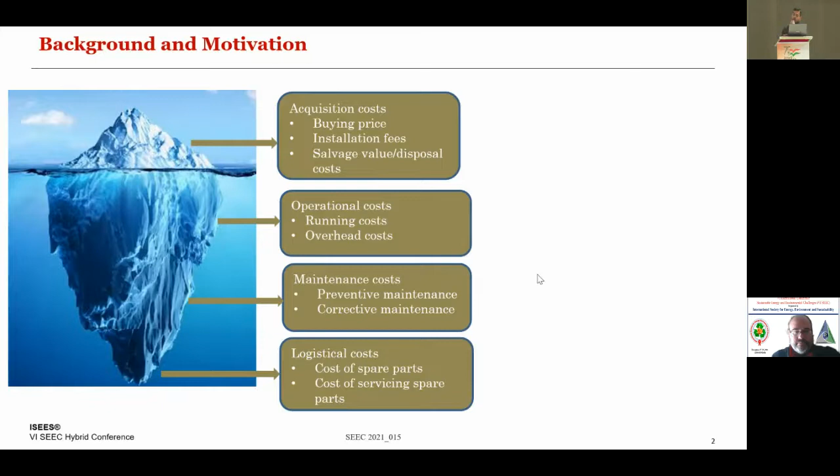So first of all, we have to know what is TCO. As you can see here, this is the tip of the iceberg. What we are not able to see is these hidden things. So TCO talks about all the things. Whenever we go to market, we generally focus on upfront costs. We neglect costs like operational, maintenance and logistical costs. So in TCO, we will talk about all the costs.

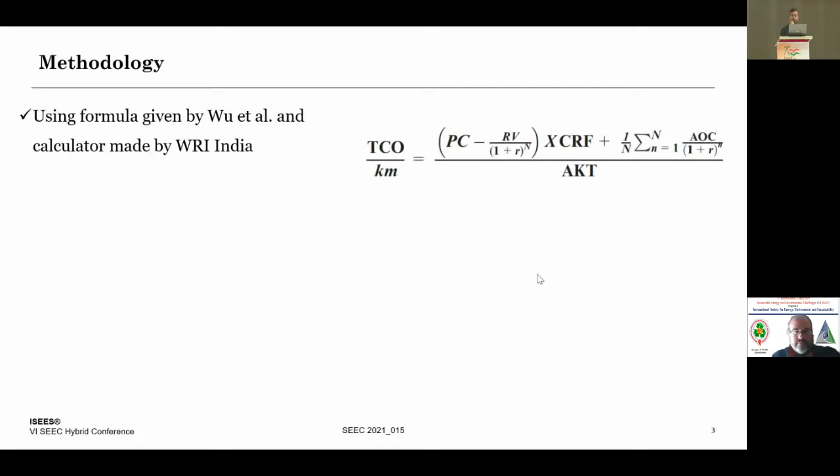The objective of the present research is to calculate the TCO of two-wheeler and four-wheeler battery electric vehicles and conventional petrol and diesel vehicles for Mumbai and Delhi, and whether they achieve cost parity before incentives or not. In my paper, I have been using the formula from a published paper in Energy Policy, and a calculator made by WRI India. So this is the formula I am using. These are the costs I am taking.

After that, I am taking incentives given by state government and central government. Under the central government FAME 2 scheme, the government is giving 15,000 rupees per kilowatt hour for two-wheelers, and there is no incentive for four-wheelers directly on the vehicle. So I am not considering any FAME 2 incentive for four-wheelers, only state incentives. I am taking 10 years of ownership, 20 km per day for two-wheelers and 35 km per day for four-wheelers as average daily distance.

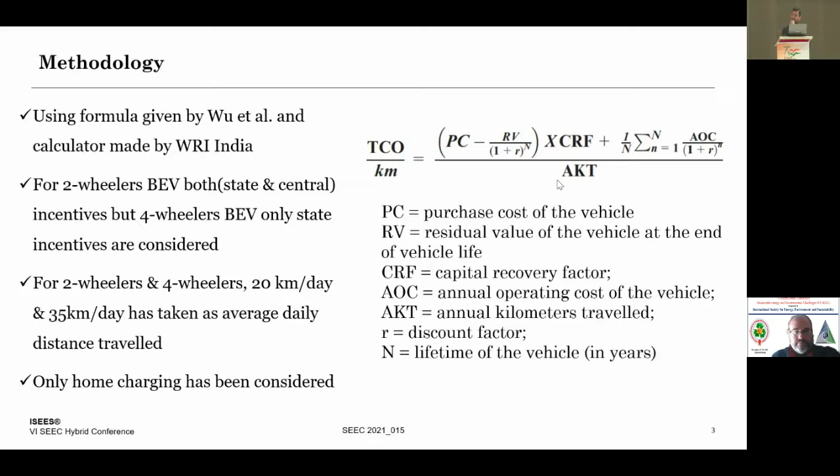And I'm not taking any charging infrastructure cost. I'm taking the same cost as our home electricity, 6.5 rupees per kilowatt hour in Delhi and 8 rupees per kilowatt hour in Mumbai. So this is the result I'm getting. These are the different two-wheelers. This is the battery electric vehicle and this is the two-wheeler petrol. This is for Mumbai and this is for Delhi.

As you can see here, when we do not include incentives, the TCO of the battery electric vehicle is high. It costs more than the conventional two-wheeler petrol vehicle. But if we include the incentive, the TCO decreases and it achieves cost parity. Otherwise, it is not achieving cost parity.

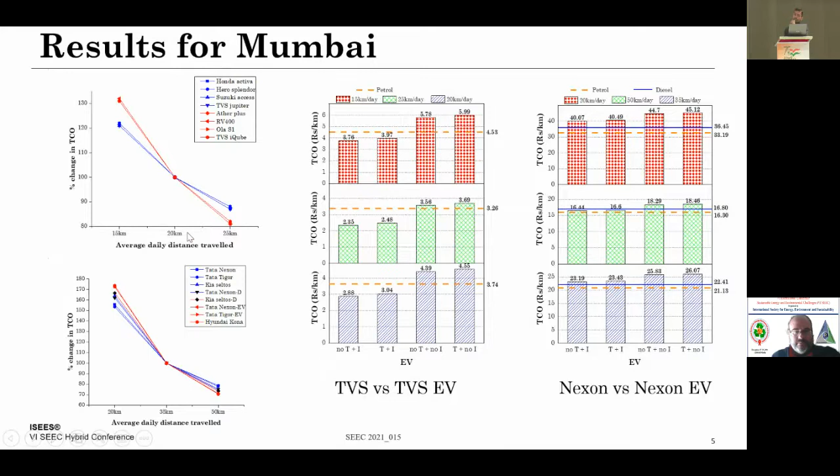For four-wheelers, it is not the case. Even if you include the incentives, it is not achieving cost parity due to the high unit cost. And as you can see here, for achieving cost parity, you have to increase the distance. I have taken 20 km per day as the base. Yes, sir. So this is the result I have found, and the cases for Delhi and Mumbai are shown.

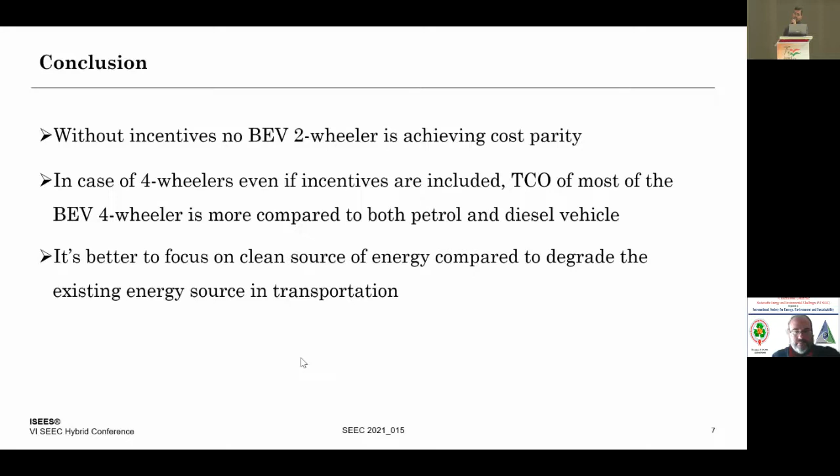So my conclusion is, without incentives, the two-wheeler battery electric vehicle is not achieving cost parity, and for four-wheelers, even if incentives are included, it is not achieving cost parity. So this is my point. Thank you.

I will compare it for, let us say, 5 years. Yeah, I have taken 10 years. 10 years, total cost. So, any incentive for, say, after 3 years battery replacement? Yeah, I have taken 0 replacement and 1 replacement. Two cases are there, you'll find it. Actually, sir, battery replacement doesn't fluctuate much. Like if they basically give the incentive as a free battery replacement at the 3rd year mark.

Actually, they are giving an 8-year warranty. Yes. So I have taken all the things. Typically, these existing batteries won't be reliable after 3 years. That's why I was saying 3 years. Actually, for 100,000 kilometers they are giving the warranty. After that, they are not giving the warranty, so you have to change. So I have taken changing the battery once. Yeah, because next time you have issues with the battery. Yes, all the different vehicles have the same issue. Okay.

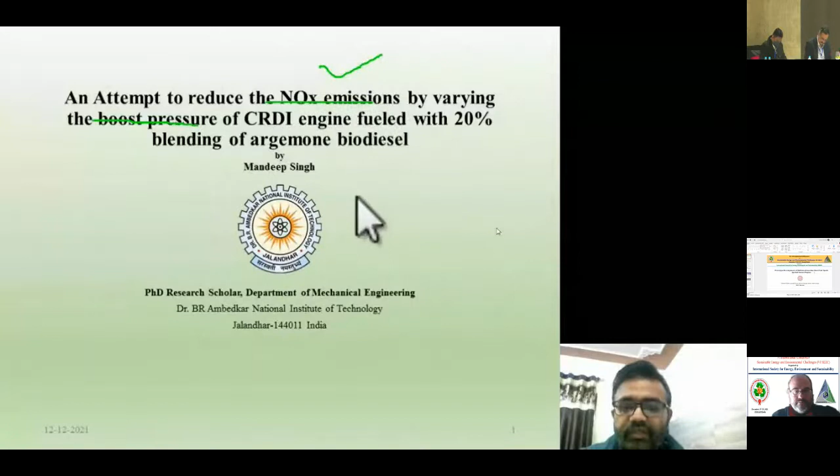Today I'm going to present my research work on the reduction of NOx emissions by using the boost pressure. Basically, we are trying to vary the boost pressure and try to reduce the NOx emissions in case of CRDI engines. To achieve these conditions, we have developed this test matrix. In this test matrix, we have considered two modes, mode 1 and mode 2. These are nothing but 2000 RPM and 24 kg load and 2000 RPM 60 kg load.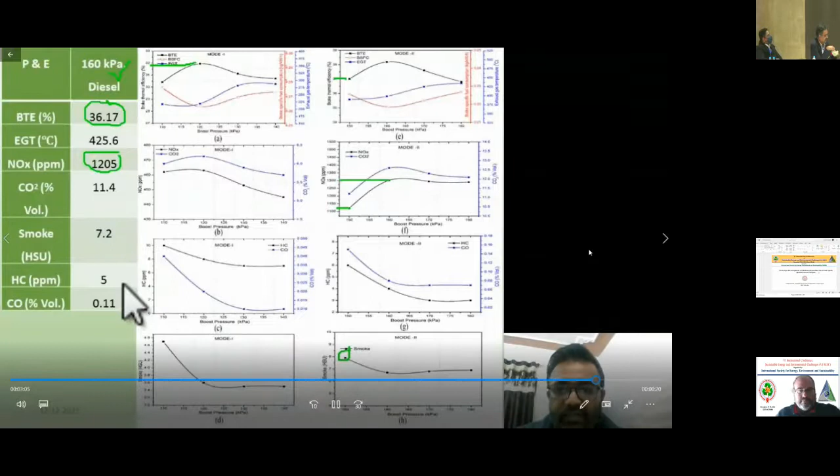So this is the comparison which we have plotted for various type of readings, and this is the main conclusion, that we can reduce the boost pressure and get a better thermal efficiency benefit and NOx emission benefit by this amount of percentage. So thank you.

Any questions? Yeah, so you said reducing the boost pressure from 160 kPa to 150 reduces the NOx. So that's the observation. Can you give the explanation to it? Yes, sir. Because when we are reducing the boost pressure, it reduces the temperature also. It reduces the in-cylinder temperature also. That's why we are getting the lower NOx emissions there.

No doubt, in comparison to the boost pressure at 160 kilopascal, we are getting a reduction in the brake thermal efficiency. But if we compare it with diesel fuel, we are getting better. For AB20 fuel, same boost pressure, we are getting lower thermal efficiency. But if we compare with diesel fuel, we are getting higher one. That is the benefit of this particular study.

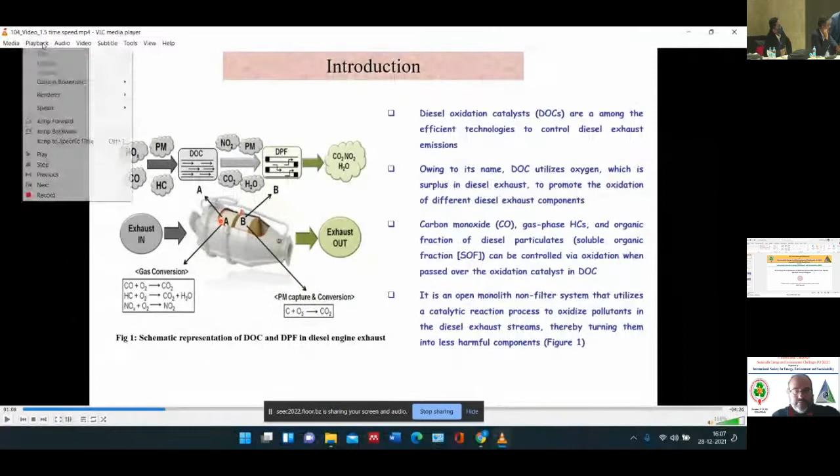My topic of presentation is copper molybdenum mixed oxide catalyst for efficient soot oxidation in diesel emission control after-treatment devices. Diesel oxidation catalysts, that is DOCs, are catalytic converters designed specifically for diesel engines and equipment to reduce carbon monoxide, hydrocarbons, and particulate matter emissions from diesel engine.

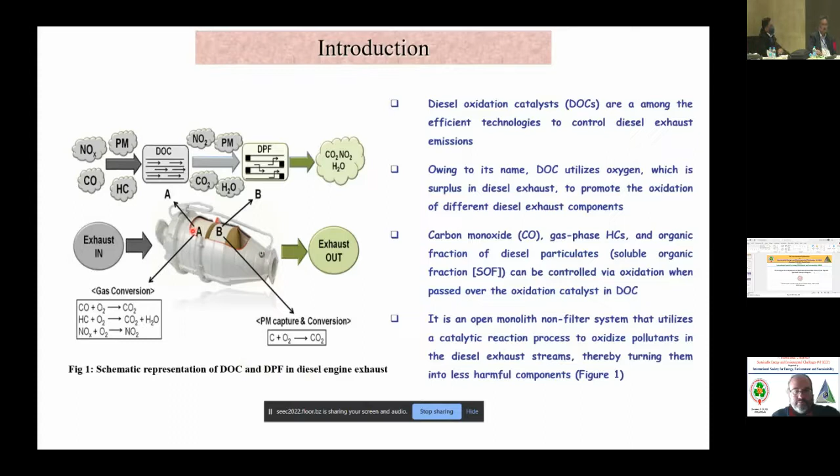Figure 1 schematically represents the DOC and DPF working in diesel engine exhaust. The catalytic converter consists of a monolith honeycomb substrate coated commercially with platinum group metals or mixed metal oxide of comparable efficiency, cased in a stainless steel container. The honeycomb structure of DOCs, with many small parallel channels, presents a high catalytic contact area to exhaust gases.

The exhaust pollutants upon contact with the coated catalyst are oxidized and converted to less harmful components. The DOC is retrofitted in the diesel engine devices with diesel particulate filter, that is DPF, to capture particulate matter and aid their conversion. The abundance of platinum group metal is limited in the Earth's crust, and they are also expensive to use in DOCs. Despite these limitations, they are used extensively because of their superior oxidation capacity.

Recent attempts have been made to reduce the amount of PGM catalyst used in DOC, or to compose a catalyst having comparable efficiency with that of the PGM-based catalyst. In the present study, we have attempted to use copper and molybdenum-based oxygen-deficient catalyst for efficient soot oxidation.

Copper-molybdenum mixed oxide is prepared by a simple co-precipitation method and impregnated with 5% silver and potassium. The prepared compound was characterized with XRD, where a highly oxygen-deficient structure of copper-molybdenum perovskite was observed from Rietveld refinement.

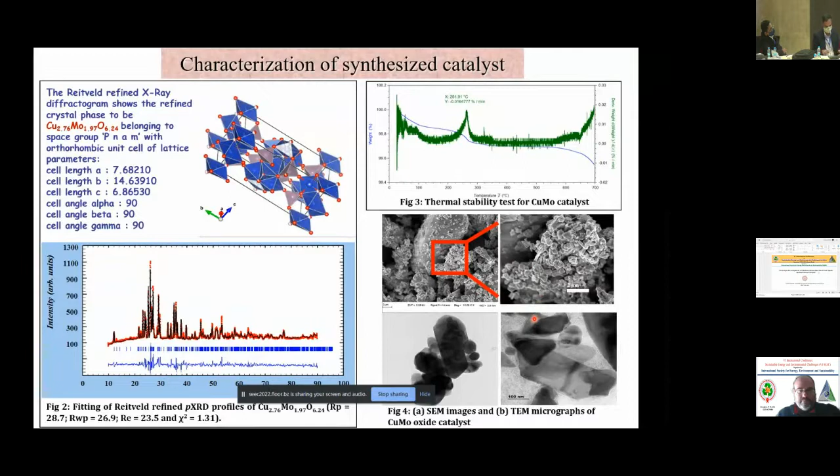The soot oxidation performance of the catalyst was tested on the TGA analyzer under atmospheric pressure in airflow, where model diesel soot was carbon black obtained from Degussa under tight contact mode. CO2 evolved was also recorded using the attached CO2 analyzer facility.

Both TGA curves and the CO2 evolution graph show that the peak soot oxidation temperature, that is Tmax, for copper molybdenum catalyst is at 376 degrees Celsius, and that of potassium and silver promoted catalysts is at 349 and 351 degrees Celsius respectively, as can also be observed from the CO2 evolution graph. All the catalysts have Tmax below 400 degrees Celsius.

The TPO profile of copper molybdenum catalyst was obtained at low oxygen content, that is at 5% oxygen, where Tmax was observed at 338 degrees Celsius. Also, the lower Tmax observed in the TPO study compared to the previous study was due to the lower ramp rate.

The repeat cycle experiments for CM1 and CM2, up to 10 cycles, were performed, which show highly reproducible catalytic activity confined in a narrow temperature range of approximately 18 degrees Celsius.

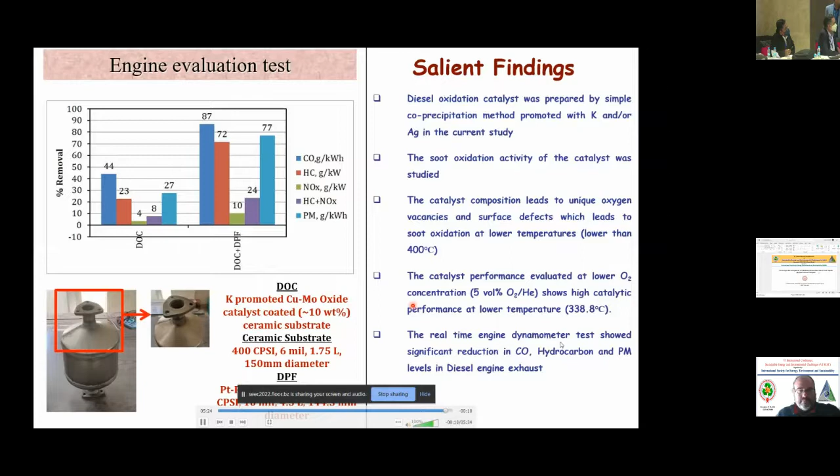Okay, one question from my side. What are the potential challenges with this particular catalyst? Because one thing I saw is that your CO2 conversion peaks at a very narrow temperature. Would that be a concern while using this as a catalyst for tailpipe emission?

Sir, this narrow temperature range that we have observed is to our advantage, I guess, because the carbon monoxide and PM are oxidized in such a narrow temperature range, so they are oxidized immediately. But one concern may be the deposition of carbon soot, as well as the unburned nature of some particulate matters, because in a real diesel engine, tight contact mode of the soot is not always observed, and we performed experiments mainly in tight contact mode. So in the real engine environment, the condition is in between loose contact and tight contact mode, so that may be a challenge.

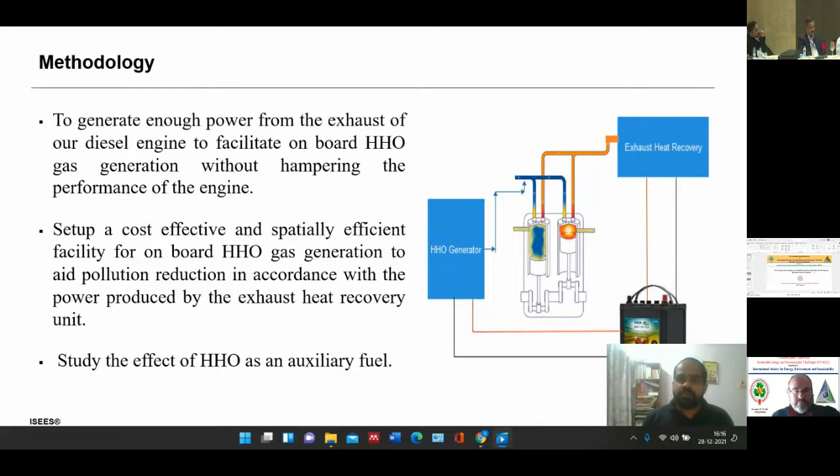The use of HHO gas as an auxiliary fuel has been studied and known to reduce particulate matter emissions. Therefore, we decided not to use or store HHO gas, but to produce it on a moving vehicle without using power from the IC engine. So we decided to use the exhaust heat, recover power from it, and produce hydrogen on board. By this, we can save on storage and also have better safety. The exhaust heat recovery part was achieved using thermoelectric generators.

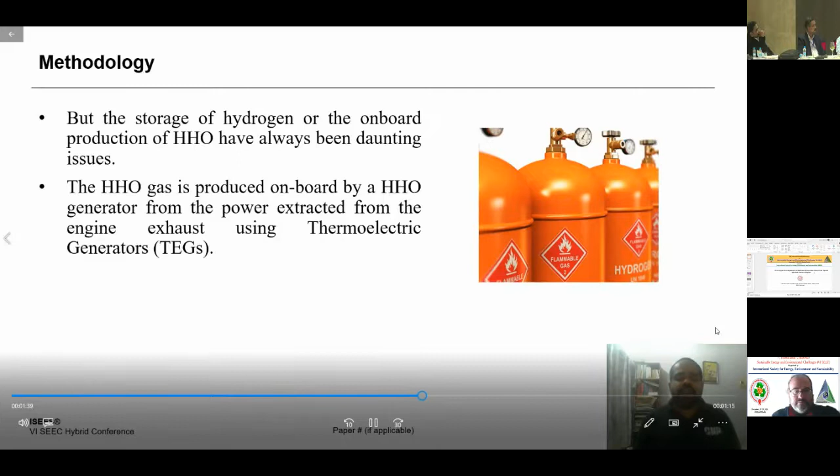The results show a significant amount of total hydrocarbon and particulate matter emission reduction noted specifically at higher loads. The engine was operated at 1500 RPM for different loads, and we could produce about 44.8 watts of power at the highest load of 45 Newton-meter, and about 585 ml per minute of HHO. Hydrocarbon, carbon monoxide, and particulate matter emissions reduced significantly at 35.8%, 28.72%, and 80.52% respectively.

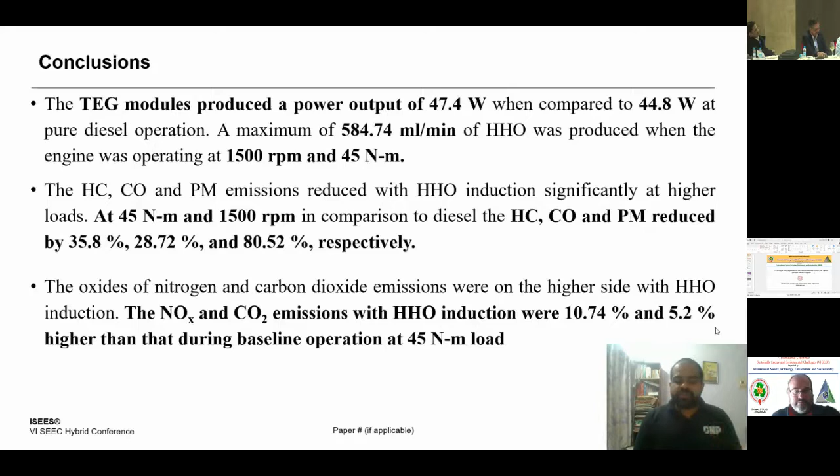But on the downside, we saw an increase in nitrogen oxide and carbon dioxide emissions, which are a result of better or more complete combustion, which is in a way good. The nitrogen oxide emissions can be treated in the after-treatment path, and CO2 is by far the best emission we can have out of a diesel engine. So we conclude that the use of HHO as an auxiliary fuel, with onboard generation using exhaust heat recovery, is a viable option. Thank you.

Thank you, Nikhil. Any questions for the presenter from online? Oh, he's not available for that option.